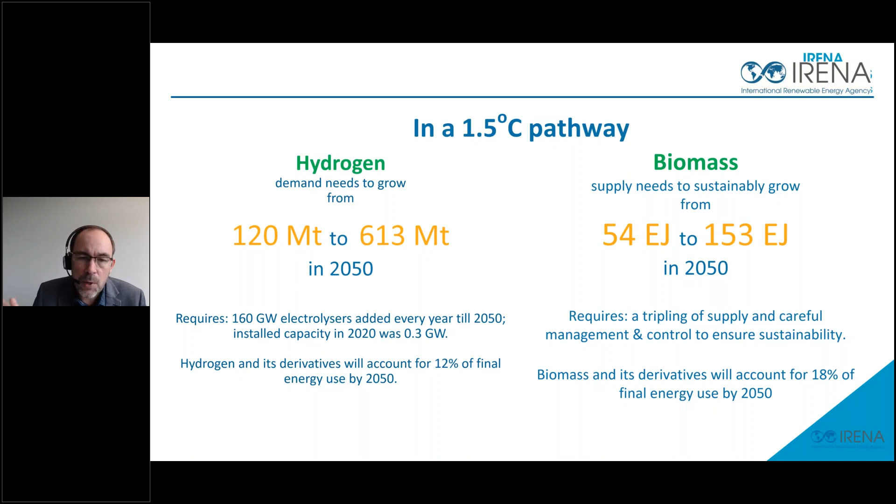So together, bio-based fuels and feedstocks and synthetic hydrogen-derived fuels and feedstocks will be critical for several end-use sectors, in particular heavy industry, steel, the chemical sector, but also in long-haul transport, shipping, aviation. And that's where renewable methanol potentially comes in. So that's my segue to hand over to Xiangwu, who's going to dive into how we perceive renewable methanol and its future. Xiangwu, over to you.

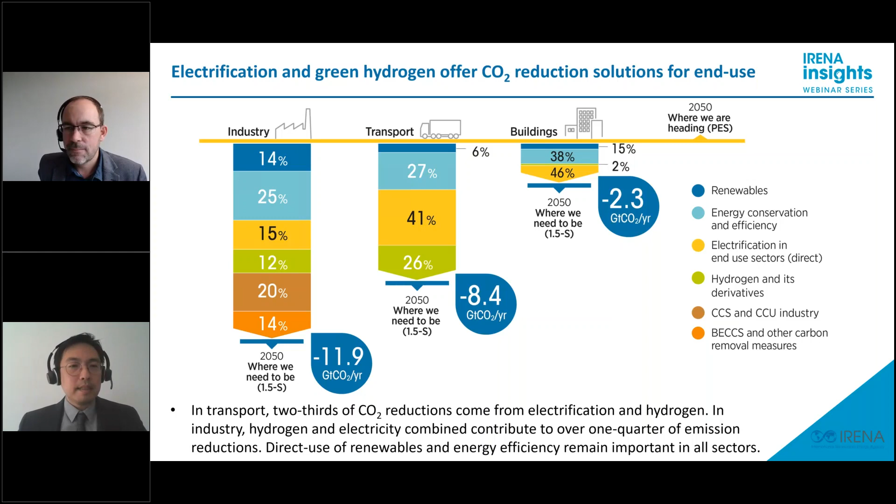Next slide, please. And one more.

Okay, thank you, Paul. As we saw in previous slides, achieving net zero emissions requires also huge efforts for the chemical sector. Methanol is actually a key chemical building block, thus reducing its carbon footprint is urgently needed. IRENA considered methanol as a key energy vector and tried to look at the solutions, alternatives to fossil-based methanol already back in 2013 with the biomethanol technology brief.

There has been quite significant developments in this sector, and with a fast-growing interest and necessary for net zero pathway, we partnered with the Methanol Institute to explore the latest information and outlook for renewable methanol, which includes not only biomethanol, but also e-methanol. The new report was published earlier this year and available both in English and in Chinese at our website. Next slide, please.

In the last 10 years, the global methanol market has grown rapidly, and the demand has more than doubled from 40 million tons in 2009 to 100 million tons in 2019, and the production capacity reached 150 million tons. The main methanol use was in the chemical production, such as formaldehyde and acetic acid, etc.

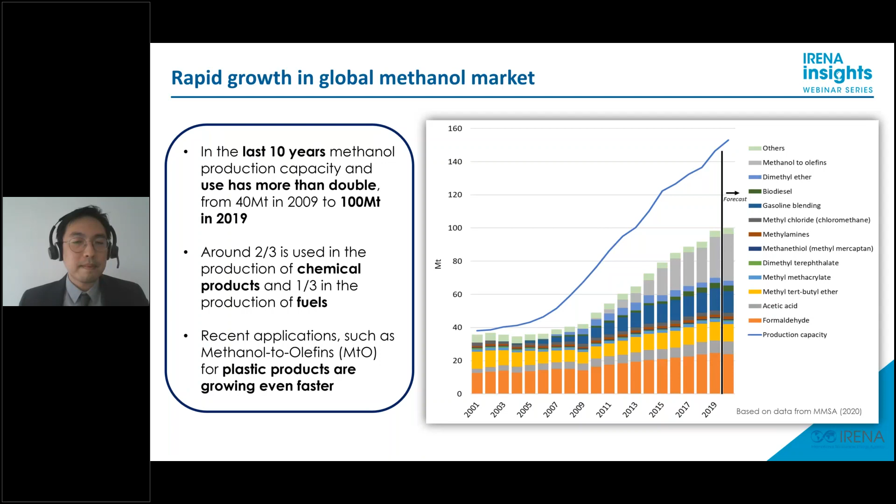But the recent growth is mainly coming from two main markets: the chemical building blocks and fuels, especially the plastic manufacturing application, so-called methanol to olefins, has grown even faster in the last decade and has been concentrated in China. Next, please. Next slide, please. Right.

So methanol has three main potential applications, such as methanol for chemical building block and as fuels for shipping and fuel cells for road vehicles. Current methanol production largely depends on coal and natural gas. Unfortunately, renewable options today supply less than 1% of the global methanol production.

There are two main renewable options, which were also the focus of our report and the focus of today's presentation and webinar: biomethanol and e-methanol using green hydrogen and CO2. Next, please.

For methanol production, we have first the coal-based route, brown methanol, which is mostly exclusive to China, and conventional natural gas-based methanol, gray methanol. We consider the blue or low carbon methanol to be from natural gas-based methanol, but combined with the addition of renewable electricity, green hydrogen, or CO2 captured to reduce overall carbon footprint.

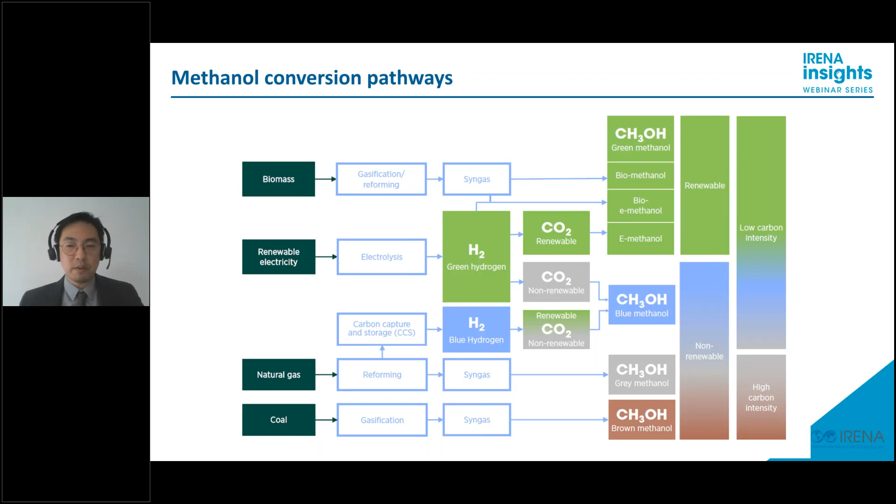Green or renewable methanol can be produced either from biomass or renewable electricity, green hydrogen, and renewable CO2, or a combination of those. Next, please. Globally, most of methanol is produced from steam reformation of natural gas. Around 65% of global methanol production is from this route, and the other 35% from coal.

To produce methanol, natural gas and coal first have to be converted to synthesis gas, a mixture of carbon monoxide, hydrogen, and carbon dioxide. In the case of coal, syngas is obtained by gasification that combines partial oxidation and steam treatment at high temperature. A typical world-scale methanol plant using natural gas as feedstock has a production capacity of about 3,000 to 5,000 tons per day, or 1 to 1.7 million tons per year.

There are also efforts to reduce the carbon footprint of methanol from fossil fuels. One option is to inject CO2 from some other process into the methanol synthesis loop. Another option would be to decarbonize the first step in methanol production from natural gas, which is the reforming step to syngas. This step is very energy intensive, requiring part of the natural gas feedstock to be burned to generate the heat for the reforming of the natural gas.

Also, we can feed green hydrogen into a coal-based methanol plant to increase capacity and reduce carbon emissions, as well as carbon capture technology applications. Next, please.

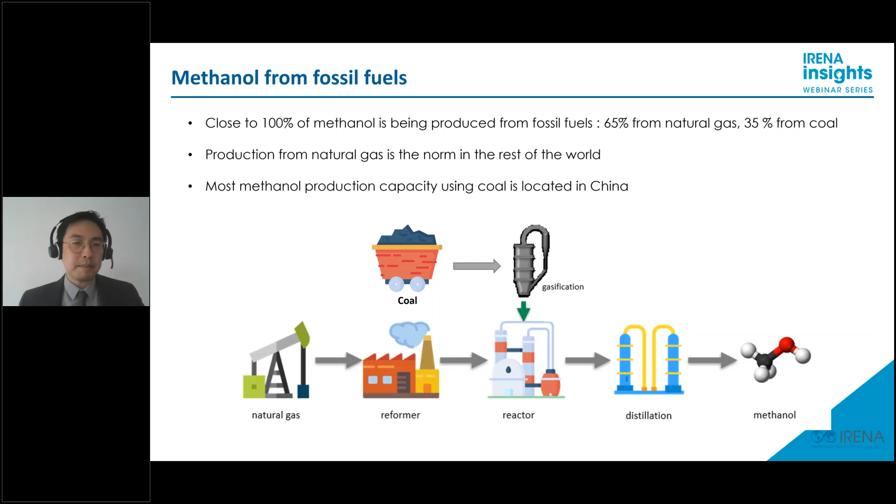As we saw in previous slides, the renewable or green methanol can be broadly categorized as biomethanol and e-methanol. At first, one of the simplest ways to produce renewable methanol is through the biomethane. Instead of natural gas, biomethane can be fed into the methanol production process, which takes natural gas as feedstock. Biomethane can be obtained with some treatment from biogas produced from anaerobic digestion of organic materials, such as municipal solid waste, dairy farm waste, etc.

This route has been used in commercial facilities in the Netherlands, in Germany, in the US. They use certification procedures to properly account the biomethane share in the final product. Next, please.

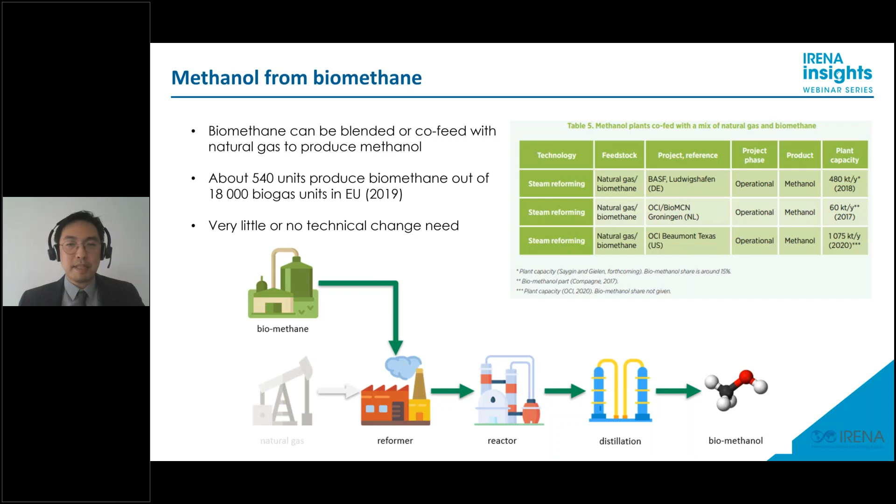Second route is the gasification. The production of methanol from biomass and municipal solid waste are relatively well known since they are similar to technologies used in the commercial gasification-based industry, where feedstocks are usually coal. However, the gasification aspect differs in feedstock preparation. Most feedstocks for biomethanol plant need to be homogenized in some way before being fed into the gasifier, as they come from different sources in different forms.

Syngas as output of gasification is then followed by conventional methanol synthesis process. From a technological viewpoint, the key to successful commercialization of this technology is to convert the feedstock to the syngas quality required for the methanol synthesis unit.

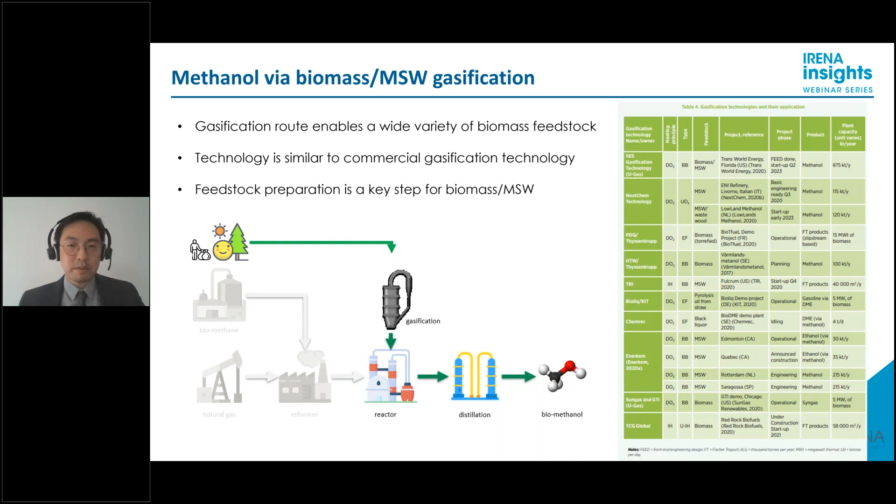Another interesting type of biomethanol technology is the one coming as byproduct from the pulping cycle. When wood pulp is converted for further processing into various qualities of paper and products, raw methanol is formed in the digester where wood chips react with the cooking chemicals. The methanol byproduct contains various impurities, and in almost all mills is used as an internal fuel for heat and power. It can, however, be treated and upgraded into commercial chemical grade biomethanol.

In 2020, a large mill in Sweden started up operation with a production capacity of 5,250 tons per year using this technology. If such a technology is applied to all global pulp production, this would lead to 1.2 million tons of methanol production per year. Next, please.

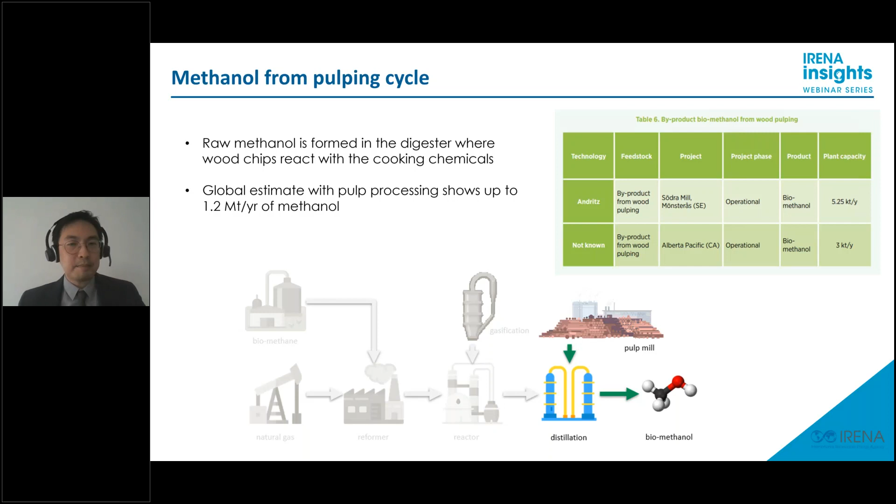So there are a number of ways to produce e-methanol through electrochemical processes. The simplest and the most mature method is to make hydrogen through the electrolysis of water using renewable electricity, followed by catalytic reaction with CO2 to produce e-methanol. Another approach is to produce both components of syngas, CO and H2, through electrolysis, followed by conversion of the syngas to e-methanol as for conventional methanol production.

The last technology is the direct electrochemical conversion of CO2 and water to methanol, and it is also being studied, but so far only limited efficiency and yield have been achieved at a laboratory scale. The first commercial CO2 to methanol recycling plant using locally available cheap geothermal energy has been operated in Iceland at an annual capacity of 4,000 tons of methanol per year.

In China, a plant started operations at 1,000 tons per year of e-methanol. This is a demonstration project, and it is the first to show the production of methanol from solar power on an industrial scale. Other e-methanol commercial plants are being planned around the world, with production capacities ranging from 8,000 to 180,000 capacity, and overall, this would produce in excess of 700,000 tons per year of methanol. Next, please.

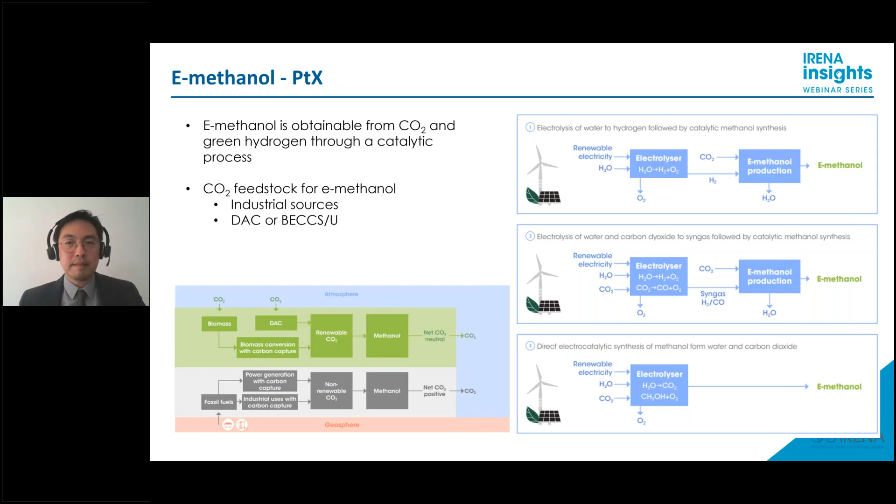There is another interesting concept which combines biomethanol and e-methanol production routes. So biomethanol production has around 50% carbon efficiency, but this hybrid process using the remaining 50% of carbon with green hydrogen to produce more methanol, or the oxygen from hydrogen synthesis put back in the methanol production, can enhance the overall efficiency. This combined approach allows to lift the carbon use up to around 100%. Next, please.

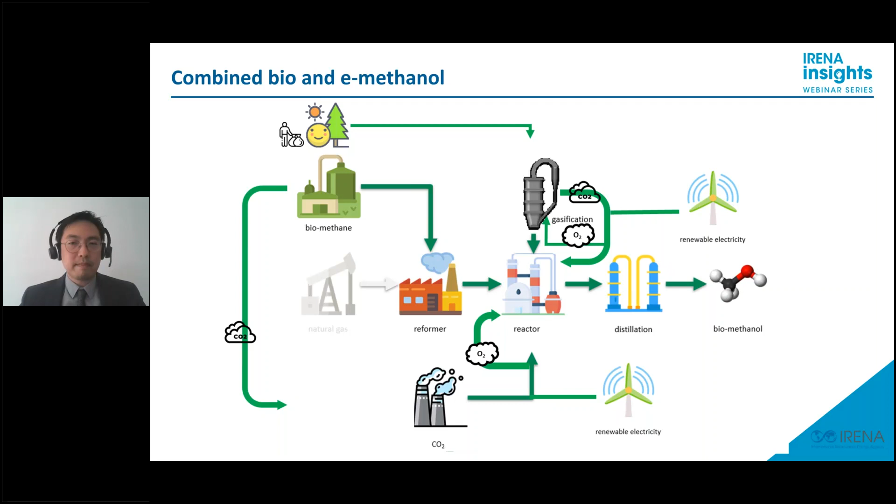It is with a low cost of feedstock up to $6 per gigajoule, which corresponds to the upper limit of biomass and municipal solid waste commodities commercially traded in Europe and the United States. Production of biomethanol from the waste streams of other industrial processes offers opportunities to improve overall plant economics by simplifying feedstock logistics and also the sustainability of the product.

Co-production of heat, electricity, or other chemicals has also been suggested to further improve biomethanol economics. Another option is to co-feed biomass into a coal-based gasifier or biomethane into a natural gas-based methanol plant to allow flexibility of biomass introduction and also bring down the cost of the final product.

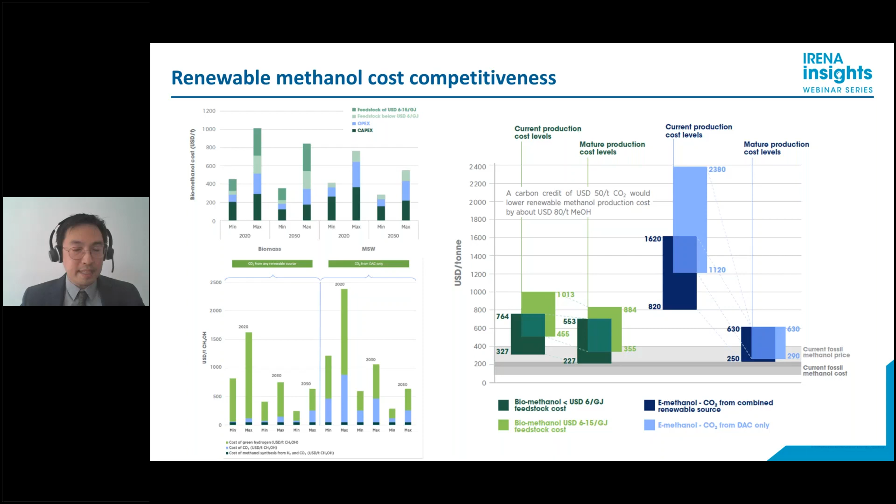So to enable and facilitate the transition to renewable methanol from fossil-based methanol, it needs a systematic investment throughout the value chain, meaning not only the technology, but also the infrastructure, supply chain, deployment, and application. Methanol is an energy vector with multiple applications. For transition to a net zero world, we need to create a level playing field to facilitate sector coupling and for an optimized solution. We need to also acknowledge properly the contribution of renewable methanol to the energy sector decarbonization.

The fuels have been a focus of carbon intensity, and there are many policies already implemented and also planned. But in the chemical sector, it has been seen less. Supporting market forces in the chemical sector will encourage both industry and consumers in low carbon and carbon neutral products. With that, it concludes my presentation. Thank you very much.